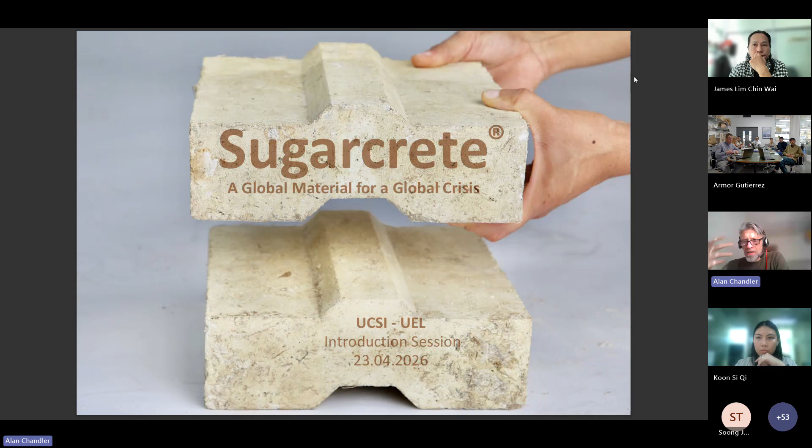So yeah, it's a global material for a global crisis. We've done this work over the last 4.5 years, and it's generated a certain kind of impetus. So it's always nice to go back over it and try and explain what we've done, how we've done it.

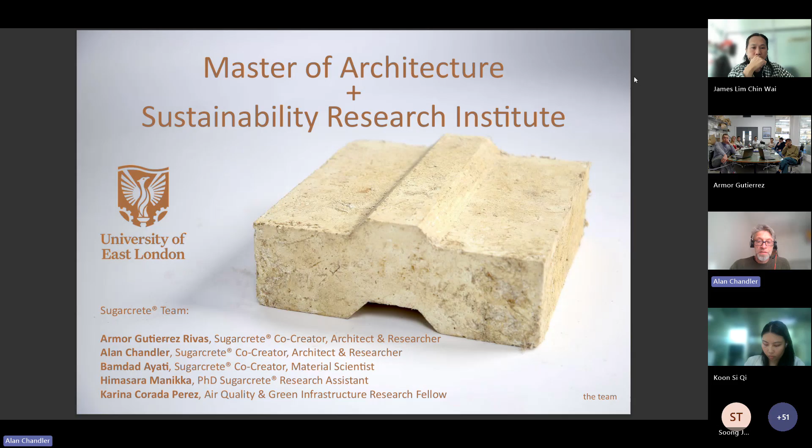So these are the folks that are in charge of it, I guess you could say, although it's more like skiing rather than driving—you have to zip round trees and rocks as you go downhill quickly rather than being in total control of everything, which is kind of what innovation is about. Hopefully through this little presentation, you'll get a sense of what we've done, and maybe that's useful for people thinking about innovative new ideas and the steps you then realize you have to take to get something somewhere.

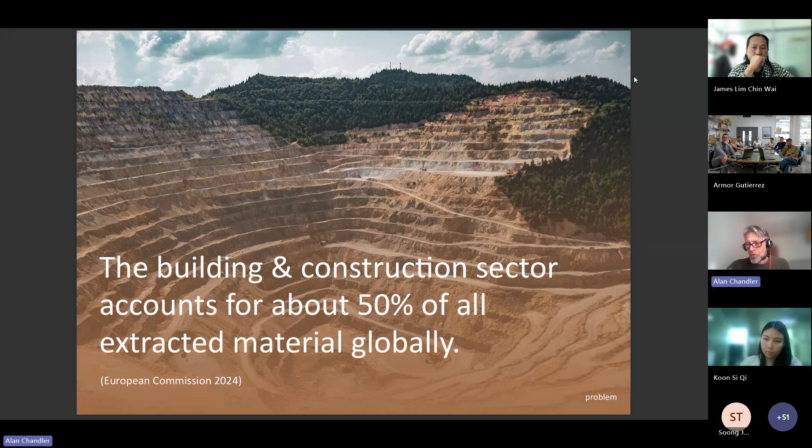So we look at the problem, right? The problem is a big hole in the ground. Building and construction sector—we've all decided to become architects, and that's possibly one of the most damaging professions we could have chosen to join. We can see that it's a bit of a big issue. So therefore, we need to think about not doing architecture, but how we do architecture and what we do it with.

Obviously we have this target from Paris, below 1.5 degrees C, depending on where you look. We've already exceeded it by twice, but that shouldn't stop us trying to make sure we can keep it down again. So part of what we're doing is related to this issue of carbon and climate change, but that's not all—we'll see a bit more about what we're interested in as we go forward.

Our usual default position is, hey, let's build in timber because that's good for the planet, right? I hate to spoil that for everybody because that's not necessarily the case. What we understand by timber construction these days is actually a pretty northern hemisphere phenomenon. The fast-growing pine-related timbers we use are concentrated in certain places and not others. And if we start cutting trees down in the global south, they're usually connected to rainforests, which is an extremely bad idea. So the kind of timber production we're used to globally is pretty much a northern phenomenon, which doesn't help much because most of the global growth is going to be happening in the southern hemisphere.

So the question for us, if timber is a slight problem—and we'll talk more about that later—can we upcycle globally what we're going to be growing anyway, rather than simply growing trees? This is a big question for us, and it's what set us off on our journey of exploring agri-waste. There are certain questions one needs to ask when exploring agri-waste: how much of it have you got, and what exactly is your enemy—what are you trying to replace, what's the innovation actually seeking to do?

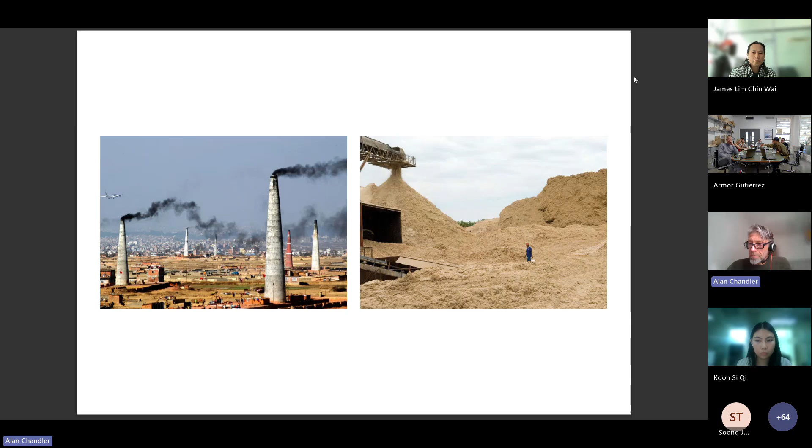India is the second largest producer in the world, and it produces quite a lot of this stuff. So if we're going to tackle a very large industry of brick making, we also need a very large amount of stuff to tackle it with.

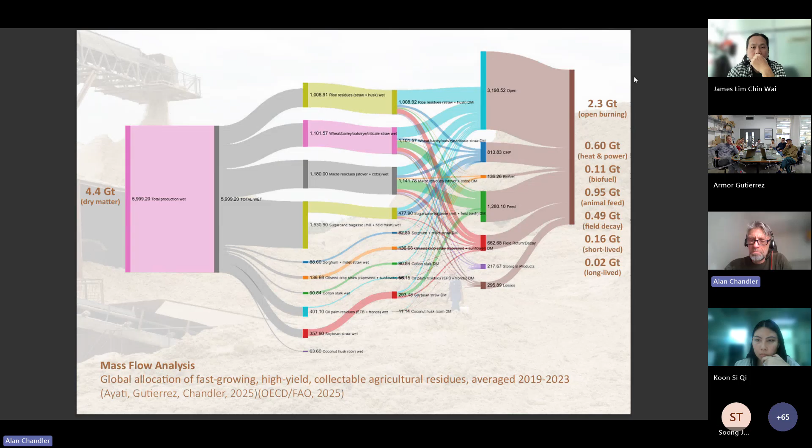So what we're looking at is how can we extract some of this waste? And if we did, what would the results be? So if we only look at the stuff which is kind of waste, doesn't have value, it's not generating electricity or feeding cows or doing anything useful, we end up with still the 2.3 gigatons just burnt. We've also got nearly half a gigaton of stuff that's just left in the field to rot.

So with that 3.25 gigatons, let's see what we can do with it. If we compare it to industry, purely on weight, we've got bricks, which is 2.18 gigatons, and insulation, which is a tiny amount of gigatons. But those two products end up being $94.6 billion worth.

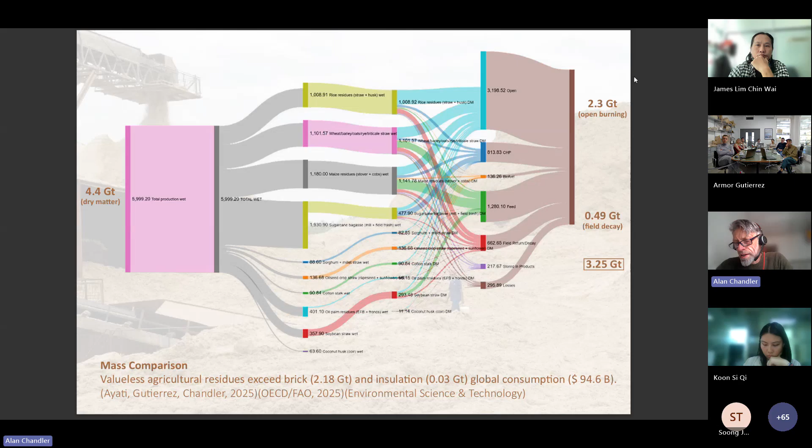So if we can divert some of this waste material into bricks and insulation to the value of $94.6 billion, you can see in terms of tonnage, we've got plenty to spare. So if we can simply divert this useless waste into these $94.6 billion worth of product, then we might have an idea.

And alongside that, in terms of money, we've also got the carbon. We've got a lot of carbon being generated in this dry matter that is able to be held. And if we can secure it in construction materials, in buildings for 50 years, then we're doing a pretty good job - we're not releasing it. And that is the key thing that we're looking at, how we can bring these things together in a sensible fashion.

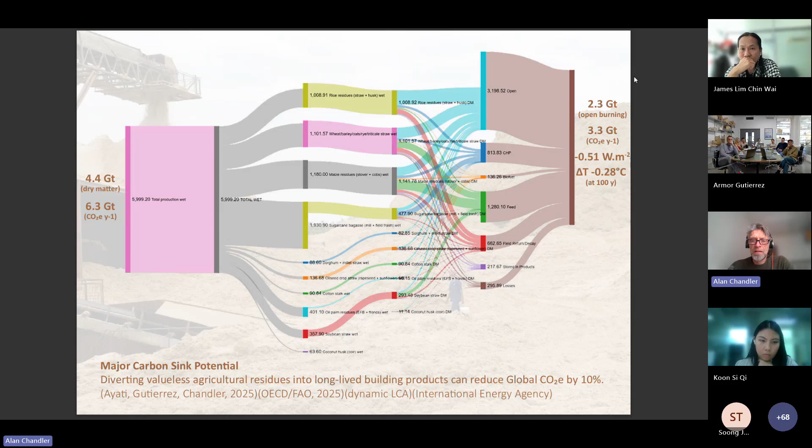So looking at sugarcane, there was kind of an accidental reason why we looked at sugarcane. We're based in London. We don't have a lot of sugarcane in London, but we do have right next to our campus quite a lot of sugar because it's Britain's largest sugar refinery - I can see it from my office window, kind of. So we began to look, thanks to our students actually, at various waste streams running around the campus 4 or 5 years ago. And then sugar pops up.

So we begin to look at the residues of sugar. Our sugar refinery doesn't have the fibers, it's simply got the juice extract. But we began to kind of dig around, and so you begin to look at the nature of the waste products.

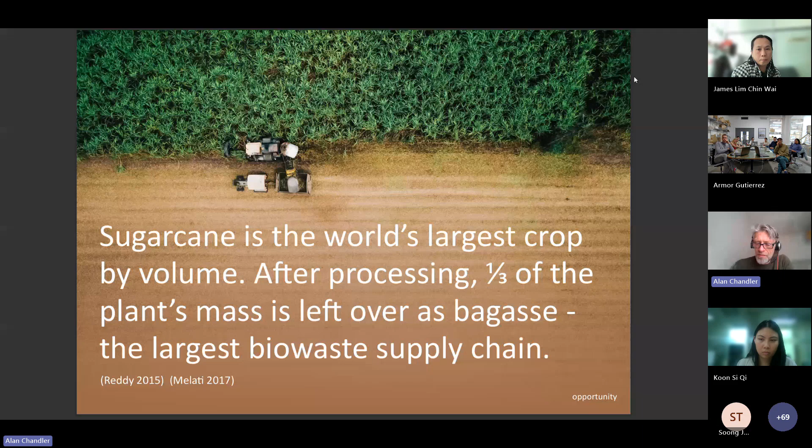So with that amount of bagasse, you could replace the global brick industry. And that's therefore viable, because a lot of the biomaterials we come across are basically pretty small scale, and it doesn't work for the amount of capacity that we need for our building materials.

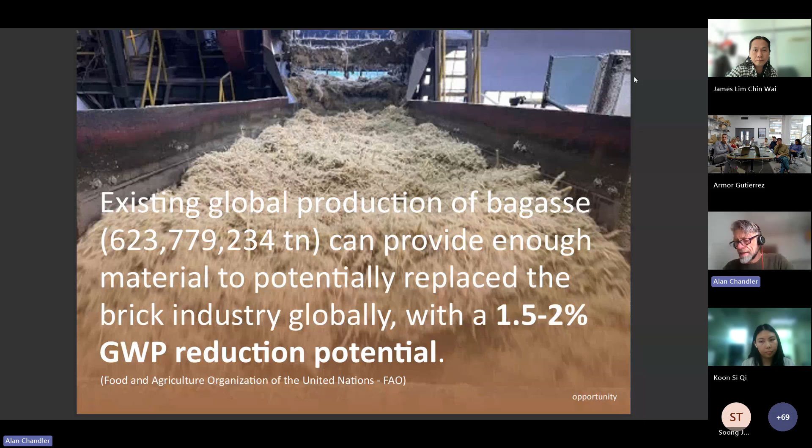We're going to be getting on 9 billion people. It's going to be multiplying. There's going to be development right across Africa and Asia that's going to require building materials. How are we going to supply that need, let alone repair the stuff that we've already built?

So this is the amount you get. You get 20,000 kilos per second, which is 72 million bricks. You can make those during Armor and mine's presentation today, and that's about 10,000 80-square-meter houses worth of bricks and insulation. So yes, just count those houses as we speak.

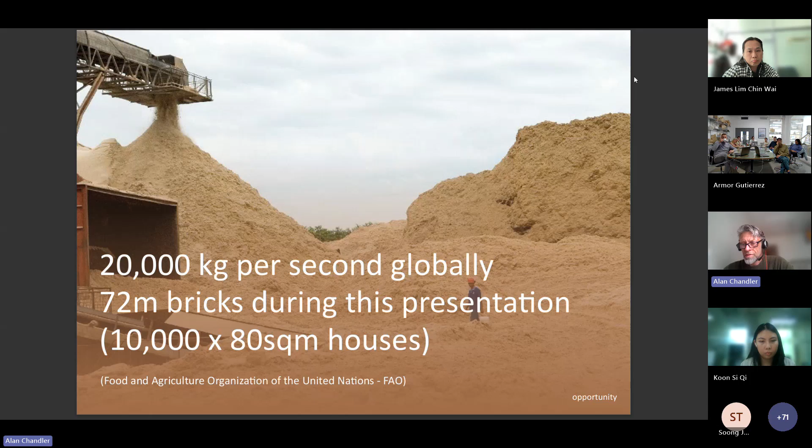And that's sort of the size of the UK. So if we got rid of everybody and started growing hemp in the UK, flattened every city, then we could probably match our bagasse supply, but we're not going to do that.

One of the advantages of sugarcane over hemp or some of these other plants is that it grows so quickly. And it grows so quickly that it's around 50% greater CO2 absorption than traditional forestry, and it's 20 times higher than hemp. So we've got something that's very efficient.

I hate to bang on about timber, but I used to like timber buildings. I still do, but it's a bit of a problem if we've looked at it in terms of carbon.

We're starting to look at it in terms of money, but maybe you also need to look at it in terms of land. So if you have a CLT wall, 20 centimeters thick, a square meter of it will require nearly 11.5 square meters of forest. And bear in mind that forest will need to be there for 35 years, more or less, to get the timber out of it. If we looked at a timber frame wall to save a bit of timber, because CLT is solid, then we can get it down to 5 square meters of forest, which is pretty okay.

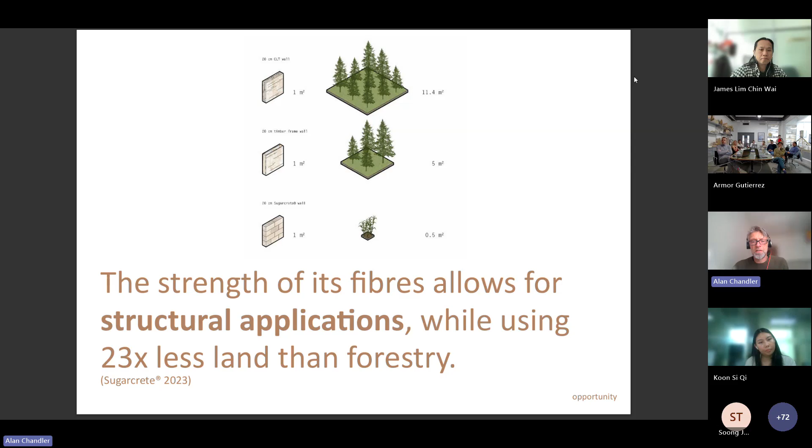We have our engineer colleagues, AKT II, have calculated, just looking at the log, forget the leaves, just look at the log of a tree, you're only actually getting kind of 30% of that tree trunk as being useful for carbon. So we're really looking at a lot of wastage in the forestry industry. So for us, it's not the silver bullet to solve this carbon problem.

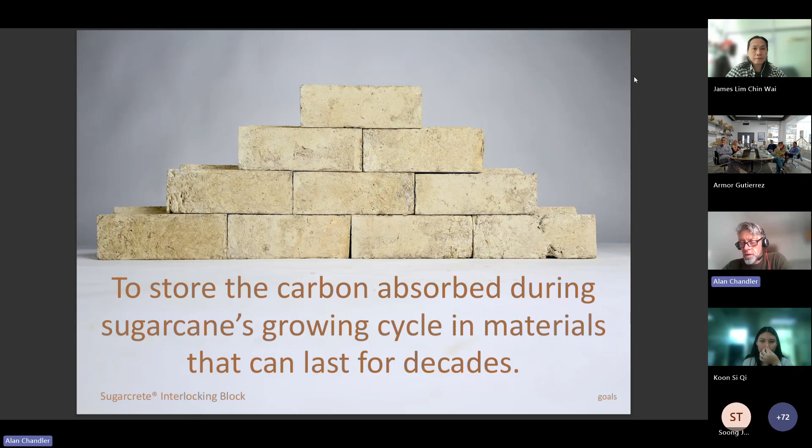So goals and strategy. Yes, how academics love to talk about goals and strategy. Anyway, to store the carbon absorbed during sugarcane's growing cycle, we need to stick it in something for a long time. So I'll talk about carbon credits in a second.

What we also need to do, because we're proper architects, we think about people more than we think about buildings almost. We need to develop a material which is going to be of benefit to society, not simply through carbon terms and money terms, which often ends up in very few people's hands.

How can we also share the knowledge? How can we begin to try and promote the use of this material that we've come up with so that it's open source as much as possible? You can share it with communities. They can transition from being virtually enslaved to brick kiln owners. And how can we open this up? So there becomes the sort of social question as well.

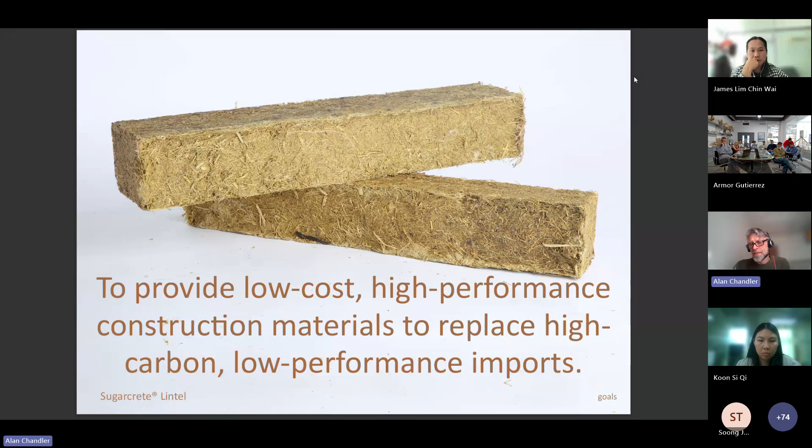And obviously these things need to perform. So we need to be able to validate their performance. We need to be able to benchmark biomaterials against conventional materials, which is very difficult because all of the testing that goes on has been developed for traditional materials. I say traditional, like the last 150 years, steel, concrete. So what we need to do is to be able to get our heads around that whole certification question as well.

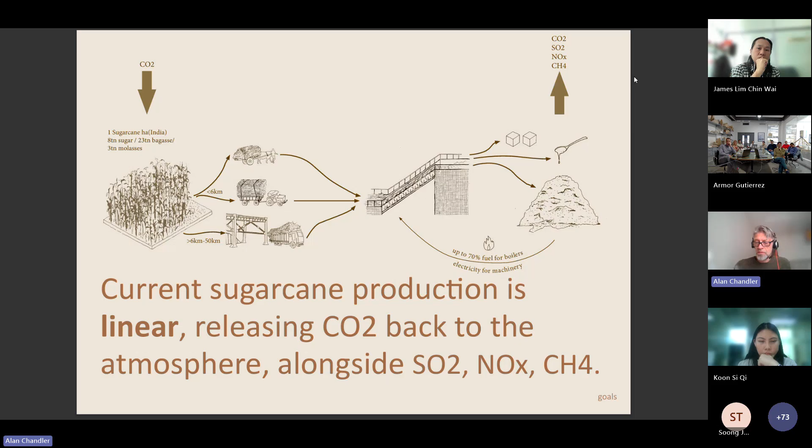So effectively what we're doing is taking this linear process of sugar production, harvesting, some of which being burnt for value, and taking the stuff which doesn't have value and making sure that we don't release these chemicals into space. This is also telling us where the production of Sugarcrete ought to happen, because if you're generating the bagasse close to where you're growing it, then we are looking at a global south solution, an equatorial sugarcane belt solution, rather than one fixated in Europe, because that's not the center of the globe, believe it or not.

So when we start going kind of circular about it, I notice on our map we're still in the middle of the globe. I think we need to change this.

What we need to do is look at this whole cycle: diverting some of the materials, producing the materials with as few additives as possible so it's as simple and traceable as possible, making construction materials and buildings which can be put together such that you can reuse those materials as often as possible. And eventually, when you can't reuse them anymore, you have a product which can be ground up and become a soil improver back to the fields.

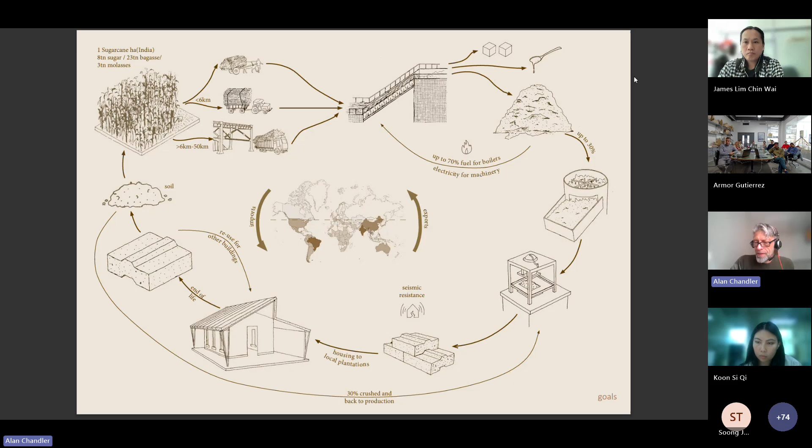The interesting thing about the brick industry is that they're basically excavating the clay just below the topsoil, making it so you can't really grow your plants there anymore. So in India, the brick industry is stripping out all of the clay from the ground, depleting its own ability to grow crops. So really we need to get a grip on this one.

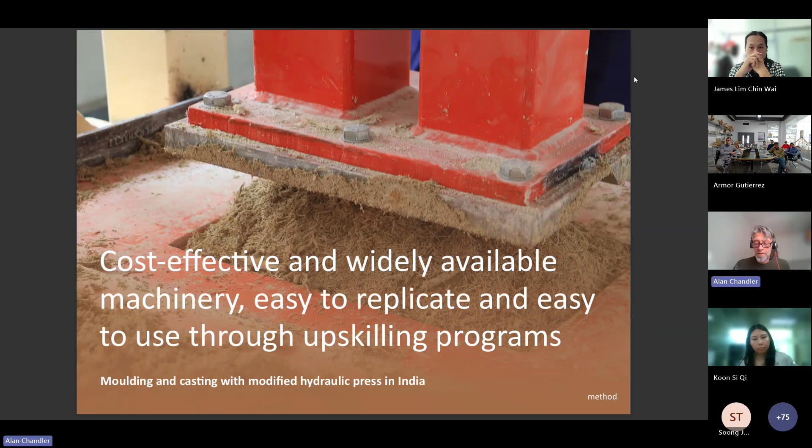Circularity. This is a photograph of one of the machines we've developed with our partners in India, Chemical Systems Technologies. They jumped on what we've been doing with our communications and contacted us, and invested in making a building that we could test, using materials and equipment that is incredibly simple so that it's as shareable as possible. You can buy this equipment from our partners if you want to set your own factory up. That's the whole point, and then you get supported to manufacture. That's the plan.

Talking of connections, India has been our most energetic connection, but we have a series of others. This map is still out of date now - trouble is we'd spend our entire time updating it if we did. So we're basically speaking to people all over the place, and some of these conversations are turning into work that we can actually consider impact.

So in order to facilitate that, we've had a series of bits of legal paper to try and make it work, and we've got a process now where we can begin to go from initial conversations through non-disclosure agreements, through memorandums of understanding that are linked to an ethical policy we've written. And then we're making project agreements on a case-by-case basis with the intention of creating buildings.

So we're into our second building now. We've got several others starting to pop up like mushrooms. It's become quite a successful, if slightly interesting process - it's a thing in itself. The material science suddenly turns into law and IP and all that. But architects are used to that kind of paperwork stuff - it's what we spend most of our time on, after all.

So the testing to industry standards is critical. No one's going to buy it, no one's going to believe it unless you can show you pass a test. The value of being within SRI is that we have our own labs, so we know what we're going to get before we have to get a lot of funding together to pay lots of money to certification laboratories. The plan is to become a certification laboratory, and once we can do that, then we can certify what we're doing.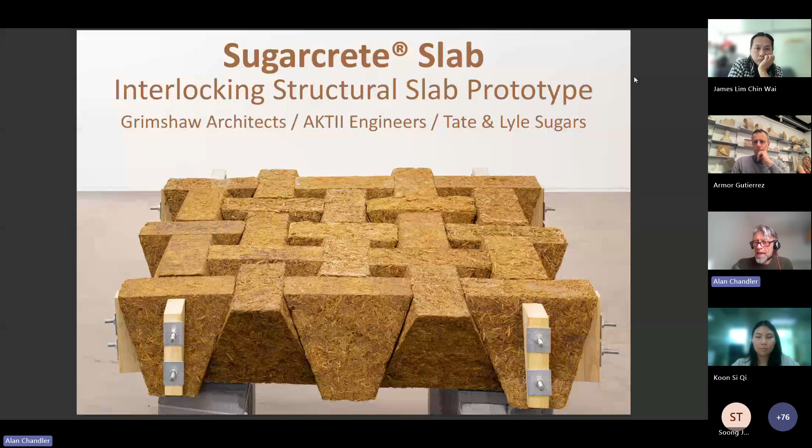So I'm going to now hand over to Armor, who's going to talk about exciting things. Over to you. Thank you very much, Alan.

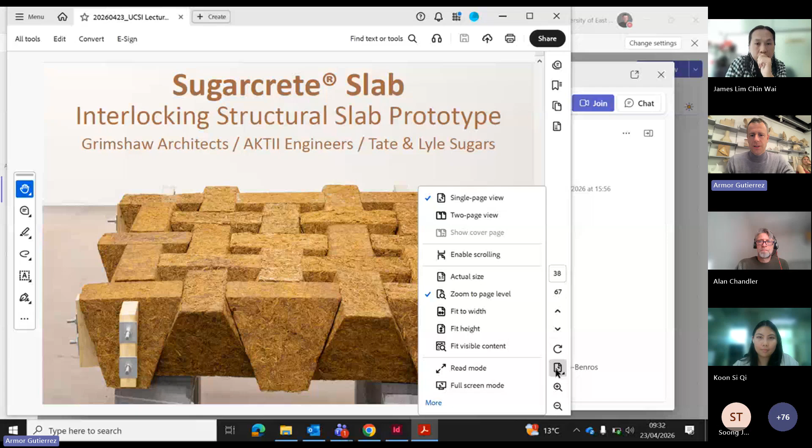Alan has done a very good job describing what we are doing and how we are doing it. And I want to show the results of some projects that we have developed, all of them in collaboration with students from the University of East London through live workshops, which we develop at the beginning of the academic year. It's the first thing that the students do when they arrive at the master program of the University of East London. They have 2 weeks where they immerse themselves into construction, into building prototypes at one-to-one scale, and then they report and document that building process into a set of reports, in collaboration with external partners.

From the beginning, we believed that this was something we couldn't do just looking at the work we do internally. We need to look at what other people are doing outside and how we can collaborate with them. So all the projects that I'm going to show, they all have external partners collaborating with the University of East London, the Sustainability Research Institute, and the Master of Architecture program, coming together with prototypes and ideas to then implement in real-world applications.

Some of them had different impacts, and we are now doing an exercise on assessing how we assess success for ourselves, whether success has to do with social impact, media impact, economic impact, or academic impact, which are very different. Sometimes they are interconnected, but very often the same project doesn't fall in the same category. I will try to highlight what we think we achieved with each one of these projects and how it relates to the next one that happened.

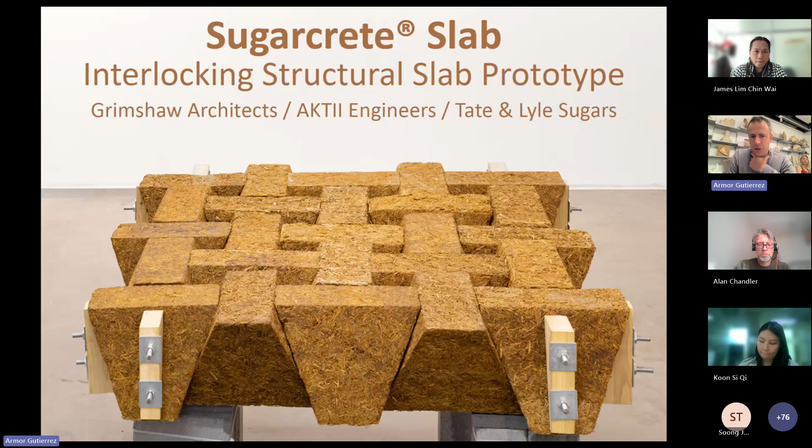We started to look at stereotomy and the ancient legacy of stone structures, from arches to vaults into flat cambers or flat arches, as well as dry stone interlocking systems from South American, Mexico and Peru structures, and how these elements, just by geometry, without the need of mortar and without the need of additional elements to connect the stones, achieve structural stability.

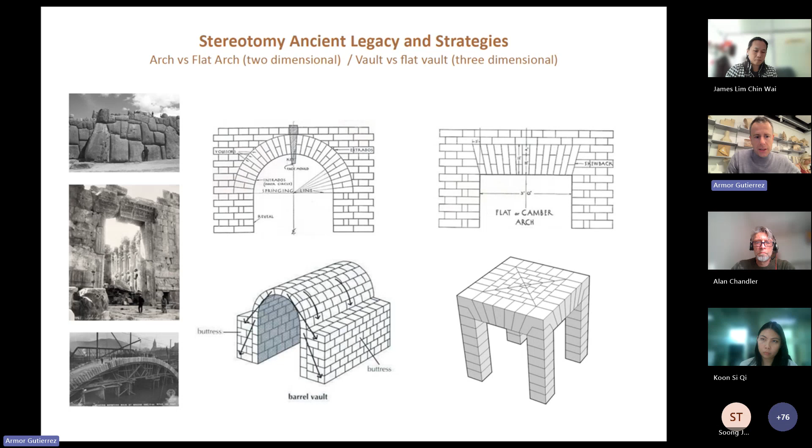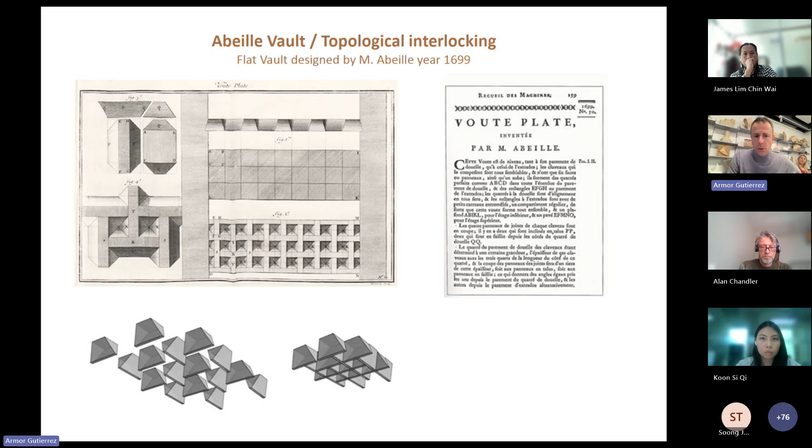We came across the work of a French engineer who developed a flat vault design. It was called the Abeille vault, done in 1699. It was a vault that was just playing with geometry and interlocking strategies to create a flat slab or a flat ceiling that, without any mortar, will stay in place just by applying compression on the perimeter.

So we replicated the system using Sugarcrete, bound with silica binders. One of the main challenges we had is that we needed to achieve a compressive strength higher than what we had at the time. We calculated with the engineers from AKTII that we would need to reach 5 megapascals of compressive strength, and we were down at 1 at the time.

So we worked with colleagues in the Sustainability Research Institute, material scientists, to find new binders and new compositions that could achieve that compressive strength. We managed to get to 5, which we are now trying to get back to with formulations that can be more cost effective in India, but it was enough to do a slab prototype that could span 3 meters by 3 meters without intermediate support.

You see here the pieces that compose the slab. They are truncated pyramids and they have perforations on the perimeter. You can see the holes that are made there, and then there are metal rods that come into the perimeter and compress all the elements together.

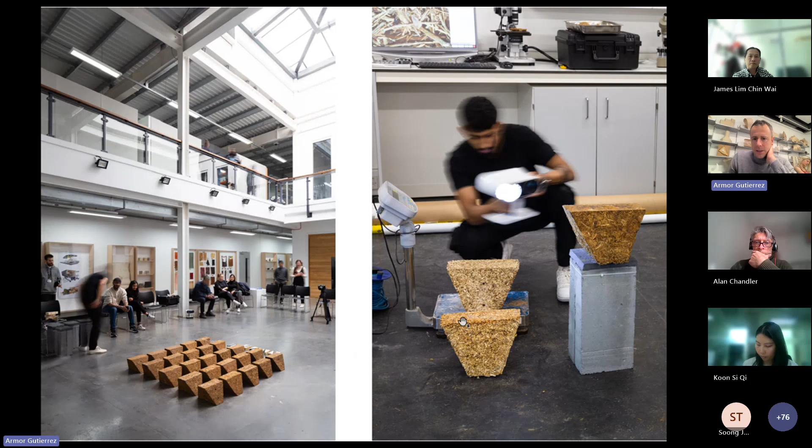We built it at the university using 3D scanning facilities to assess the shrinkage of the material. All materials that have a curing process have different degrees of reduction when they cure. In our case, we were quite interested to see if there was any reduction depending on the fiber we used, so we tested with hemp, typha, and sugarcane to see the reduction of each one.

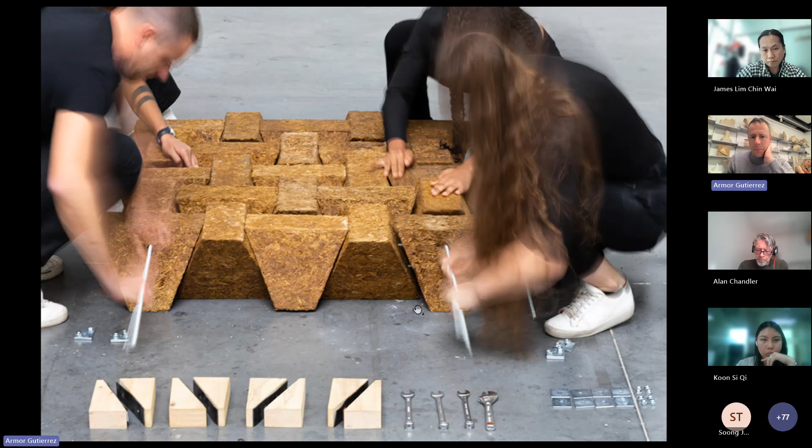Then we compared it with the initial 3D model used to create the original pieces. This is us setting it up together, placing the metal rods. There is a very good video on the website of the time-lapse process if anyone is interested. Then we place flat elements on the corners that allow us, with very simple tools, to tighten up the perimeter until we achieve the right compressive strength to keep all the pieces together.

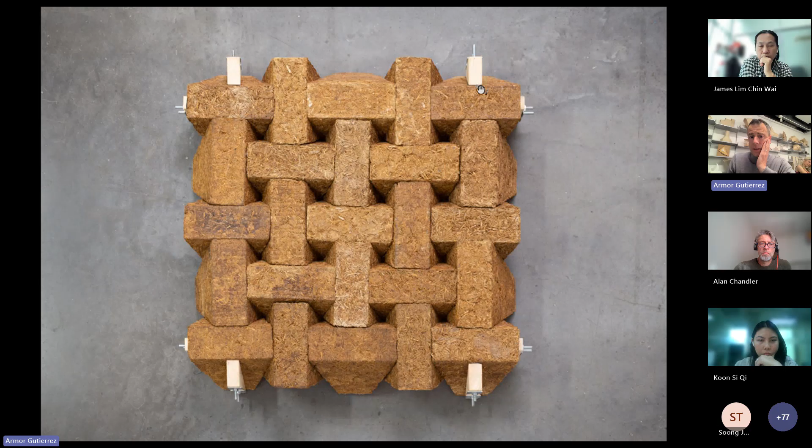The size that we tested was 1.2 meters by 1.2. We calculated it would span 3 by 3 without support in the middle, and we tested it ourselves, first for compressive strength with machinery in the lab, but then we just stood on it after finishing the workshop. This is the result of a 2 week workshop process.

As you can see, it's quite an intense process of making, and this is the final day when we typically do a day of photographing and celebrating the work that the students have done, followed by a reporting process that takes place over the upcoming month.

I think that for us, this project was a very good collaboration with Grimshaw, even though it didn't end as we would have hoped. We managed to finish in September, October, with the idea that it could be exhibited in the Royal Academy that year, which it did.

We published it initially online, and thanks to that publication it got quite a lot of media repercussion, reaching outlets in several languages across the globe. Thanks to that, we got contacted by our partners in India, so the work that you will see in India later comes from this work that we did here, which didn't leave the university.

We didn't explore how this could be used with partners anywhere in the world, but it gave us enough support and momentum to continue. Because it was very well photographed and documented, and it was a geometry that was very appealing, it allowed us to reach more people than with the samples we had done previously in the lab.

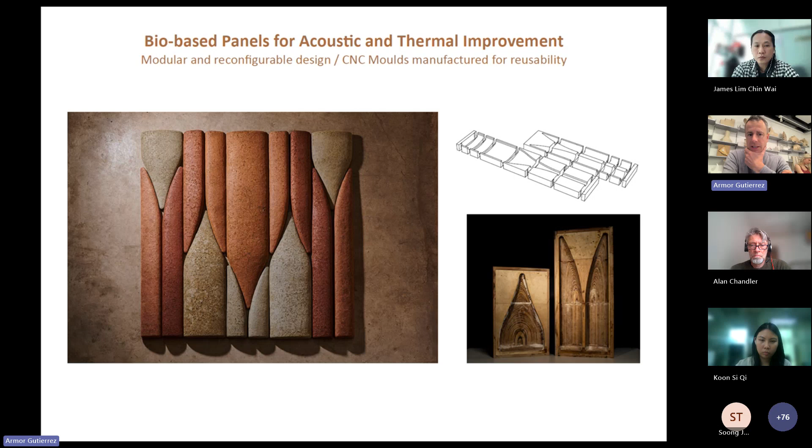The mold that you see on the right, we did it here at the university with CNC facilities, and then we casted a set of panels as a test internally before the cast that you see on the left.

These are some photos that we took on the process. You might have noticed that the photos we are showing are quite curated. They are all trying to highlight only the piece and the essence of the project.

We typically collaborate with students of photography of the University of East London, doing a cross-disciplinary collaboration where they join the 2 weeks workshop and take photography of the architectural pieces. We very often get them published in Dezeen and ArchDaily, so it's a very good exposure for photography students that are in their 4th and 5th years of their masters.

And these photos are trying to highlight the process, like all the steps that we took. We use mineral pigments, clay-based pigments, to coat some of them, coating the material in these 3 samples that you see at the bottom.

The first one is just a render, which was a lime wash with the color applied to the surface, whereas the second and the third one were mixed with the fiber itself, just to create color going across. Both of them work quite well.

We are more inclined to test this option, so you can control more the finish and the color. You can see here all the components that we put together: this is the silica base binder that we use for the mix, these are the fibers of bagasse as they come, and this is the bagasse itself, dry, once you have cut it.

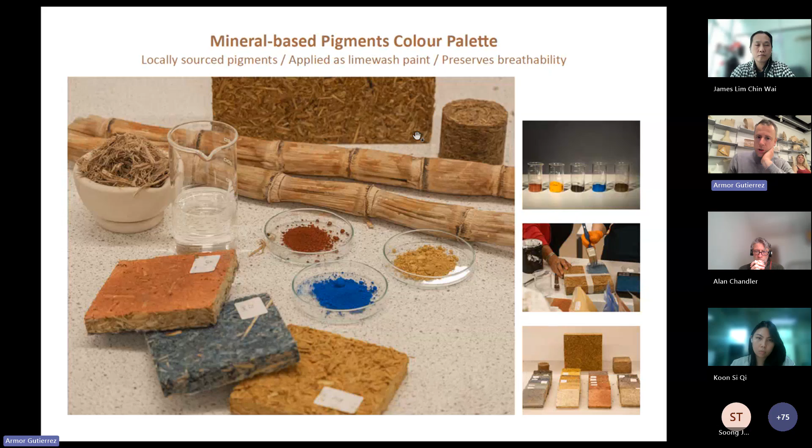Following the workshop and the collaboration, we were invited to take part in a real estate forum in the south of Spain, a region that is very touristic. It has a high demand for construction due to the good weather and being very close to the Mediterranean Sea, and it also has a tradition of growing tropical climate crops. It's called the Costa Tropical, the tropical coast in the south of Spain.

They used to grow sugarcane in the region. They had a very strong industry until the 80s, early 90s, where, because we entered the European Union, the quotas of sugar production changed, and most of the sugar industry closed. There are still some producers.

There are a lot of fields that are still having sugarcane from the time when it was growing, and it's quite interesting because in their case, the way they use sugarcane, below a certain line where the soil has salinity levels too high to grow other crops, it helps through rotating the crops. It helps improving the soil quality because it reduces the salinity, and then allows them to plant potatoes and different crops the year after.

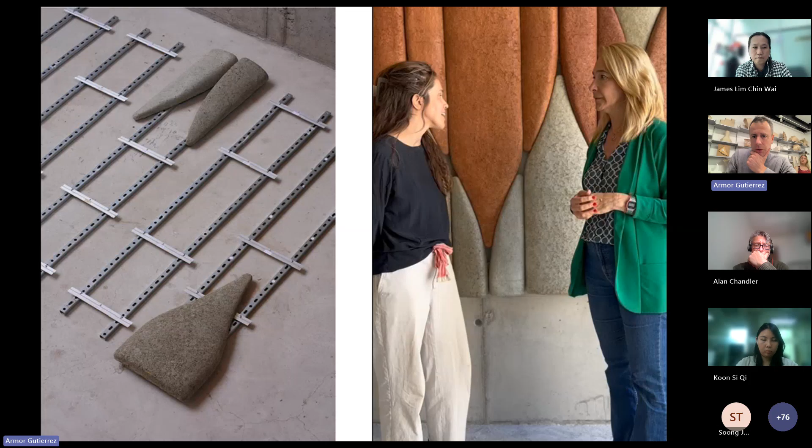I think, to summarize, the value of that collaboration was that we discovered the European certification process, which was very similar to what we were doing in the UK, but we found laboratories that were more willing to work with us and understood better because they were working with bio-based materials more extensively than we were in the UK, and understood better how the testing needed to be done. This opened up a set of new testing that we developed with them, which led to improving the formulation of the acoustic panels, which we are now using with our partners in India as well. So what we learn from one region, we always try to implement in others.

That led us into the next project, related to our collaboration with India, which started from the first project that I explained. Once we finished this lab and published it, we were approached by Chemical System Technologies, a company based in Delhi with a very extensive network within sugarcane mills in the country and also in other areas of Asia, because they provide machinery. They are the ones that set up the sugarcane mills, the refining process, and the milling process as well.

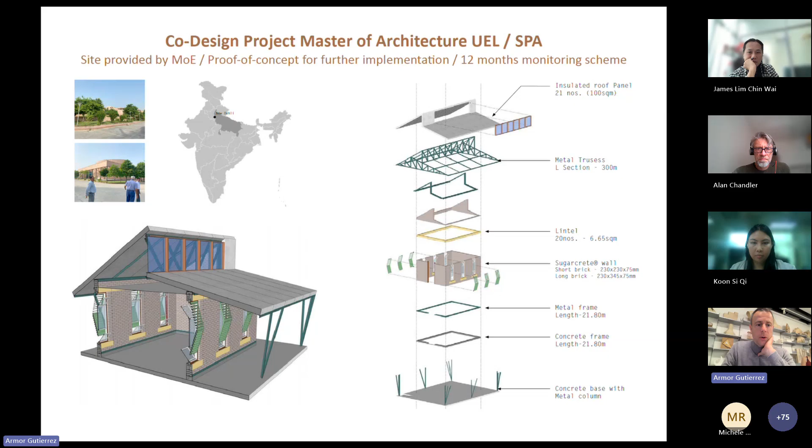So the project was also aiming as a prototype to be monitored and used as a tool to learn more about the performance of the material. It had a 12-month monitoring scheme, and we are now getting the first results of the data we developed.

In this case, the brief that we had for the students and for ourselves was to design a block. The entire construction week effort was, by default, first to design a one-to-one block that would be adapted to the context of India and what we wanted to achieve, and at the same time, in parallel, design a prototype for a school that could be built using that block.

We used a mix of bagasse and hydrated lime, so we put two components together which was slightly different. This is mineral based rather than silica based.

The idea was to create a block that would have a slightly simplified version from the interlocking blocks that we did for the slab, but still have an interlocking component into it. Working with the engineers from AKT II, they suggested that thanks to that interlocking, if it was happening above a certain height, we could improve the seismic resistance of the wall in case of movement in earthquake areas, which is where we were working in India. We are now working with partners in Pakistan who are also looking at alternatives with interlocking systems. So we think that having some degree of interlocking can improve the seismic resistance of the wall and also minimize the amount of mortar required for placing the wall together. We thought that was an advantage, and it didn't interfere with the resistance of the wall.

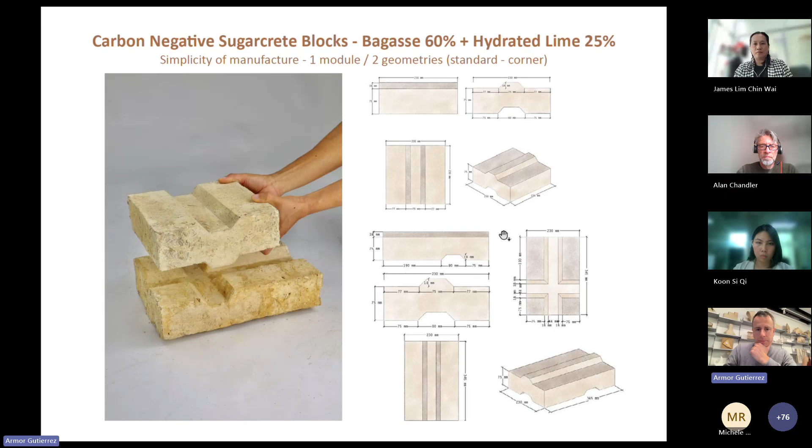We tested the corner - this is what we built with the students at the University of East London - and then we built a set of drawings as guidance on how these blocks could be implemented into a larger wall, and how, if you were within a module set by the size of these walls plus the mortar required to put them together, you would avoid any cutting of blocks when it comes to windows, openings, or lintels.

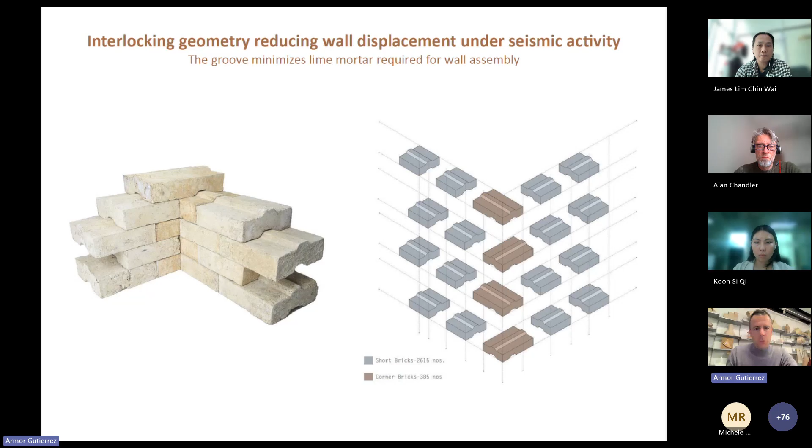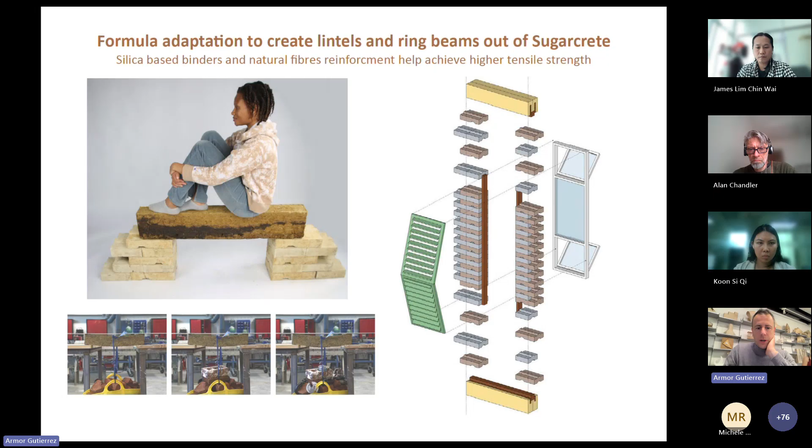We allowed for verandas in both north and south orientations to protect from direct sunlight and direct weathering, and also to create external areas for playing for the children.

In summer times and summer months, which are starting earlier and earlier in India, the rooms, especially the higher-level ones, have no insulation, and very often they become unusable. We are now looking into retrofitting strategies for some of these rooms in many schools in India. So the idea was to prevent and minimize overheating as much as possible.

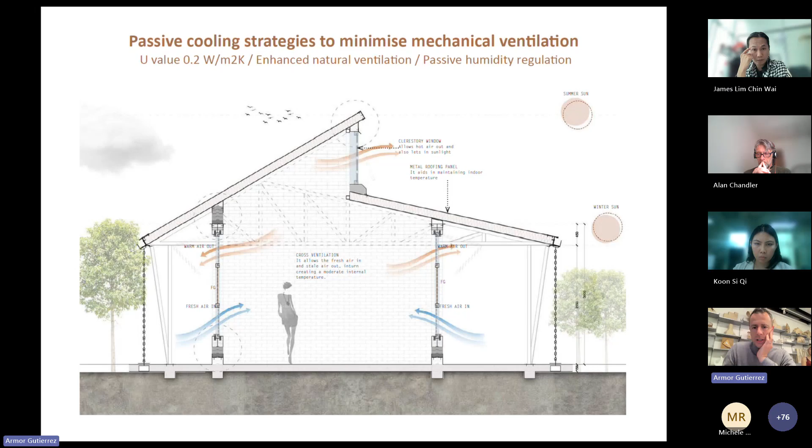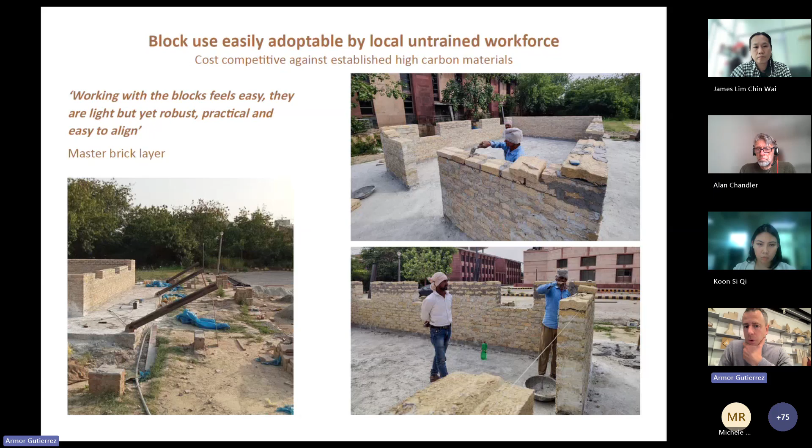And the building was built in the same amount of time that it would have required if it was made with bricks or with concrete blocks, so there was no delay in the construction process.

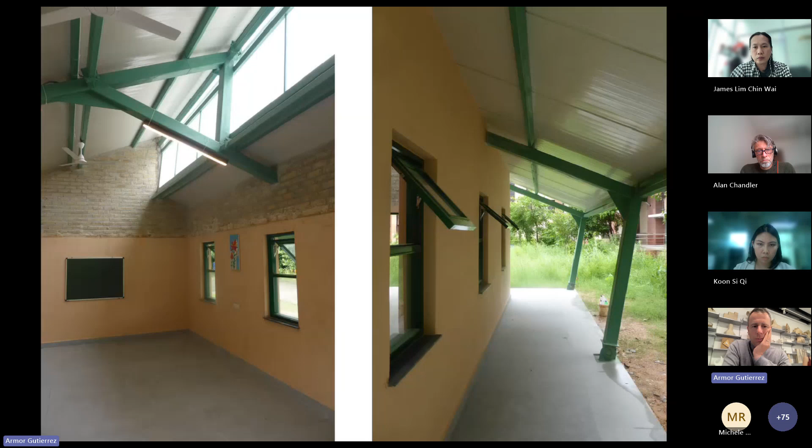We decided to apply render internally to a certain height, and then to keep the wall exposed on the upper level, and then to apply plaster render externally. We used plaster rendering with lime plaster externally and a clay plaster internally.

Internally, they didn't have any issues. Externally, it was very difficult for them to find labor able to apply lime plastering, even though lime plastering was what was traditionally used in India in all historical buildings. But it's a trade that has been lost almost in one generation due to the use of cement.

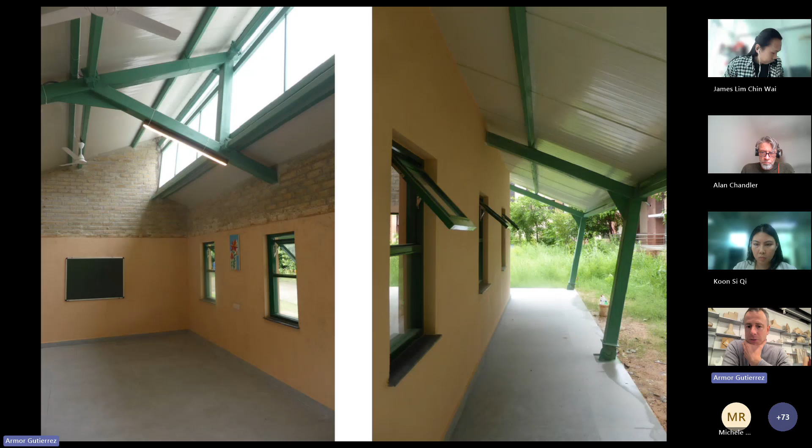So we teamed up with an architectural firm that has their own team producing and rendering, because they are specialized in earth construction, but they didn't manage to transfer that technology or information to local workers. So at the end, they ended up rendering with cement, which is not what we would have recommended, meaning the performance of the wall is probably not as good as expected because it's slightly covered on the outside. Yet the monitoring results we are getting are really promising.

The school is being used to run workshops on green infrastructure, bio-based material, air pollution, and the use of potentially agricultural waste for construction. It has an active agenda where kids from different schools, not only from the college where it sits but from different state schools, come to learn about the project, about the material, and to engage with the building.

We have a team working in the college, and they are getting all the information in terms of how people feel when they use the building and how it is performing in terms of acoustics and thermal comfort. So we are monitoring all the data that we get.

Last time we went there, when we officially opened the building, there was a music performance by the music director of the college, and he was really impressed by the quality of the sound. They are used to rooms with no acoustic consideration, where concrete blocks and bricks have been used for the walls, and ceilings are either plasterboard or directly reinforced concrete, with very high reverberation times, between 3 and 4 seconds. In Sugarcrete we are around 0.4 to 0.6 reverberation time, almost acoustic studio quality, and he was really impressed by the acoustic performance we were achieving.

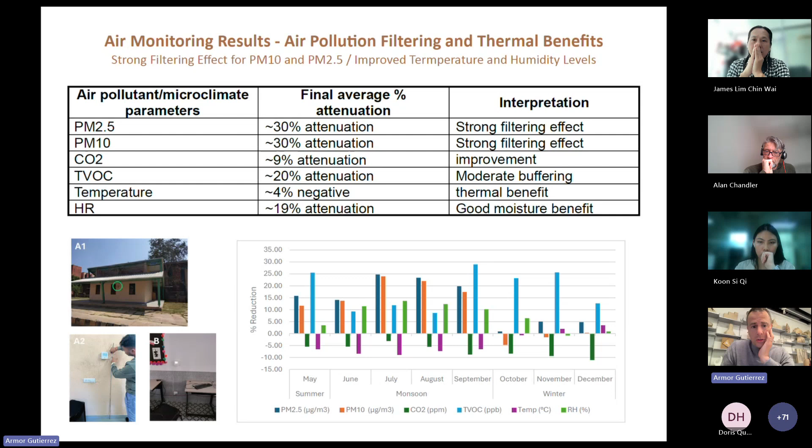It has a very good moisture buffer value, meaning it's able to absorb humidity and then release that humidity back, either outside or back into the room, as the humidity level changes. That effect might be capturing some of the compounds generated externally, entering the building and then being trapped by the blocks. Likewise, there is very good attenuation of VOC compounds and a very good reduction in humidity levels, which was something we were expecting.

And this leads to the last project we wanted to share, which is a photo from our trip to India a couple of weeks ago, three weeks before the Easter break, which builds on a collaboration we are doing with the Pariatam Foundation in India, in Hisar, in the state of Haryana.

Last year, we worked with students from the Master of Architecture to design. Their brief was to design a community center for the foundation. The foundation is currently using two different centers which are rented, so they have acquired a site and they are looking into building their new foundation building in the next year.

They saw our work on Instagram and the work we were doing in India with Sugarcrete technologies, and the founder, a civil engineer transformed into an NGO community director, approached us saying he wanted his new building to use the material and wanted us to visit them. Since then it's been an incredible collaboration.

We had students designing the center, then selected some of the designs to continue into a holistic project developed in collaboration with local architects from Studio Shunya in Delhi. This wall you see is a fragment of a classroom from the building we've designed for them, which hopefully will go to site in November.

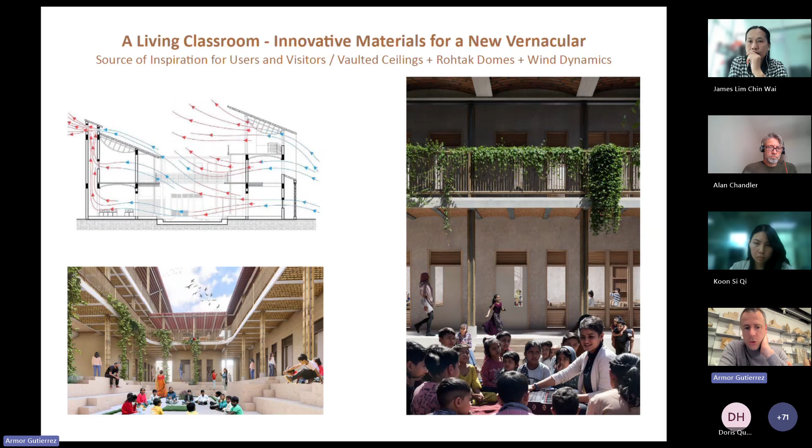The idea is to represent and embrace vernacular structural systems used for centuries in the area, such as vaulted ceilings and Rohtak domes, using Sugarcrete where possible to replace the clay bricks in creating these structural elements.

To demonstrate that this is possible and how we will build it, we organized a workshop with the community, inviting all the members from the Pariatan Foundation plus state schools, especially targeting groups of girls who came to join the workshop.

We did it over 2 days. The blocks were manufactured before the workshop by our partners, and we gave the brief to the students to co-design the installation with us. The idea was to build a quarter of one of the classrooms we designed, with the community — each child placing a block.

We started building it ourselves using lime mortar and the blocks to create the wall, and encouraged all the children of the foundation to actively be involved in the workshop.

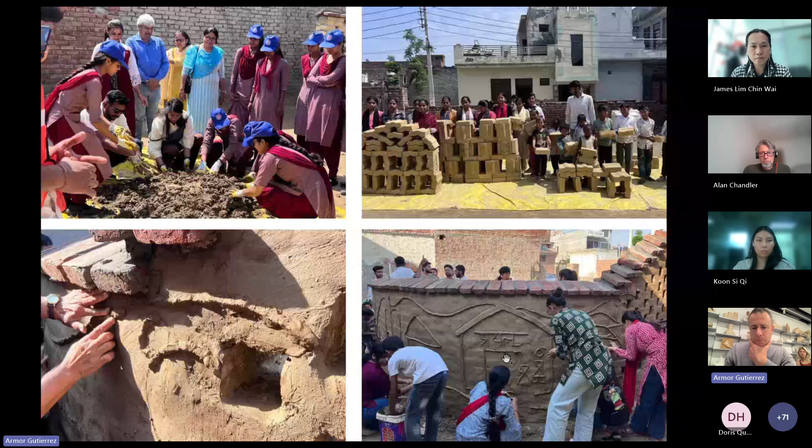Then we were joined by a two female-led architectural practice based in Delhi that are experts on clay and lime rendering. They apply two different renderings: a lime render on the outside, and a clay rendering for the internal surfaces of the classrooms. We did a workshop where the children of the foundation did some drawing, and by adding clay on the wall, they created a drawing that was personal for them. These are some photos of how it looks.

We tested the jali screen on the right as well by creating spacing, so we could use it for ventilation, high-level ventilation, which is what we are going to be implementing in certain areas of the toilets.

This is the process of making the wall. We built initially a base. We always recommend that the material is raised above flooding level or above heavy rain level, so we raised it to 450 millimeters, which was also the height of the bench. That brick wall transformed into a bench at the end of the installation.

Above that level, we started placing the Sugarcrete blocks, which we wanted to demonstrate could achieve curvature just by doing a small cut on each one of the blocks. That was quite easy to do on site. You can drill through the blocks, cut them, and very easily adjust them on site with very little waste.

You see there one of the ladies that we did a couple of lectures with following the installation, and the questions we were asked were extremely intelligent. They were very curious about knowing the material, but also about how do we fight perception and preconceptions of bio-based materials being weaker and not performing as well as traditional brick or cement. It was a very good conversation.

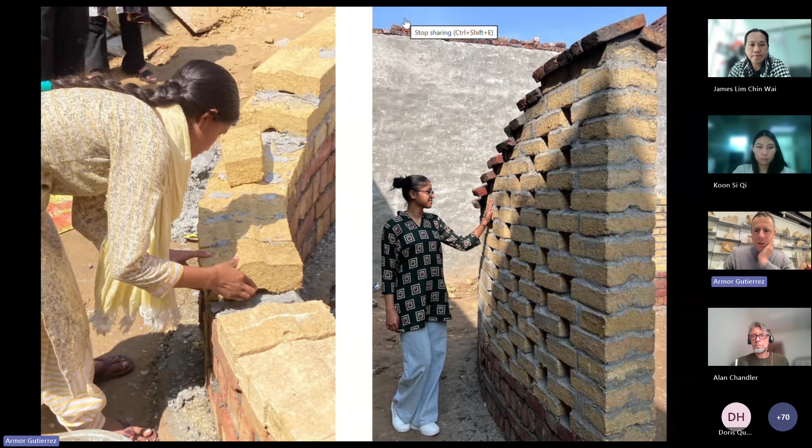I think that's the end of the presentation from my side. I think we have some time now to take some questions from the audience, either here in London or from our partners.

Thank you, Alan and Armor. I think it's a really interesting presentation, and I personally have learned quite a lot. I think we'll open the floor to any questions from our students or even from those from the UK.